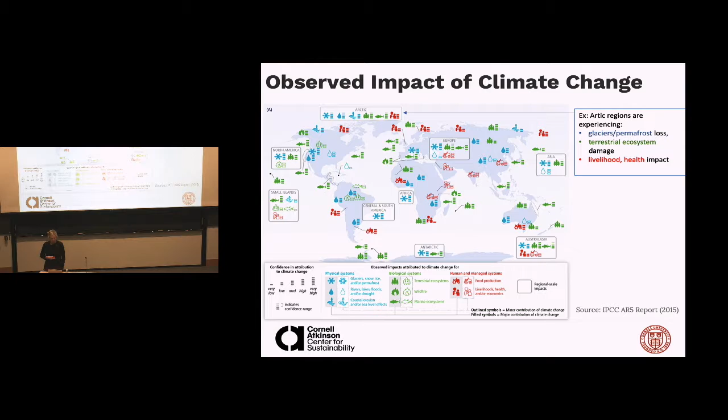In particular, I know that a lot of people here at Thayer and at Dartmouth more broadly are working in the Arctic, and that's where we see some of our most important climate change impacts that we know are a result of anthropogenic activities.

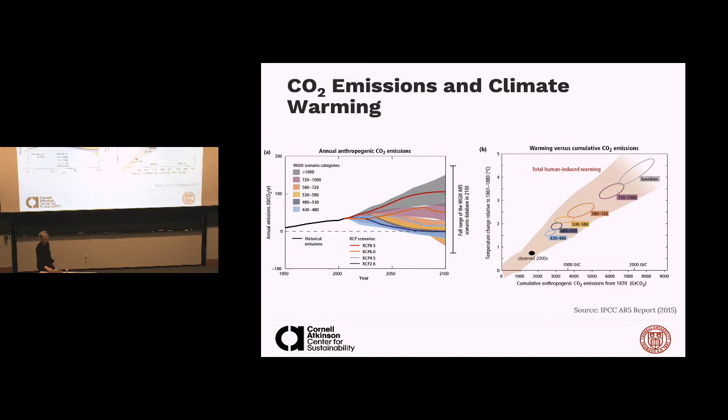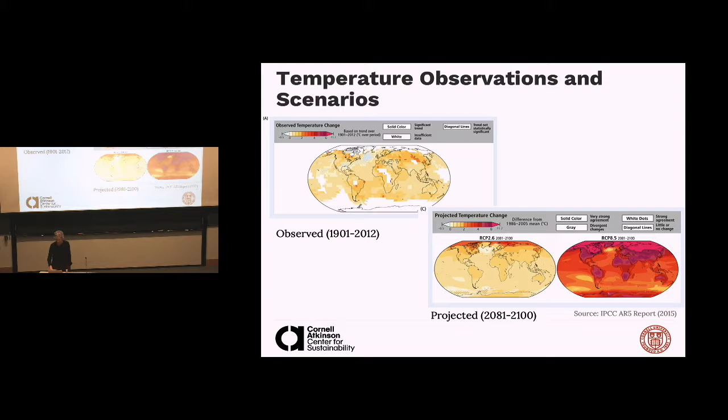Based on that report, the IPCC then tasked the team to look at what do we need to do to really limit our warming to 1.5 degrees C, right? How are we going to keep ourselves here? And that working group did a really deep dive into what would be involved and whether we could actually do it or not, right? So how are we going to be able to limit that warming, not even into the undetectable level, sort of between the moderate and high, right, is the best that we can shoot for in this case.

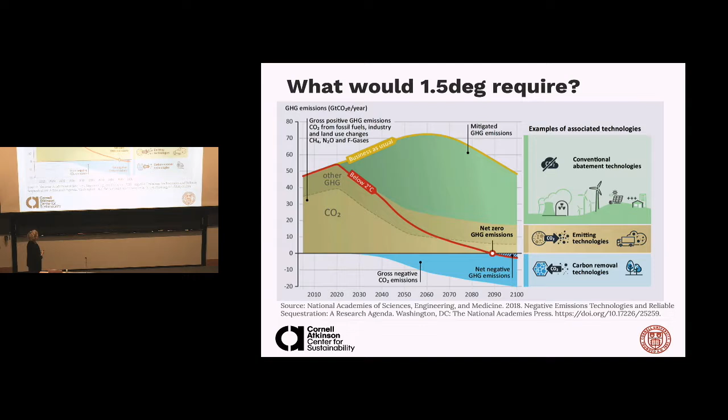So we're going to change the way we behave. We're going to actually capture. We're going to reduce our emitting technologies significantly. And even if we do all those things right, we're still going to have to figure out how to take CO2 out of the air. Right? Even if we do everything that we need to do and we all change our lives completely, we're still going to need to be able to actually do net negative greenhouse gas emissions to make that work. And it's going to cost us money. It really is, right?

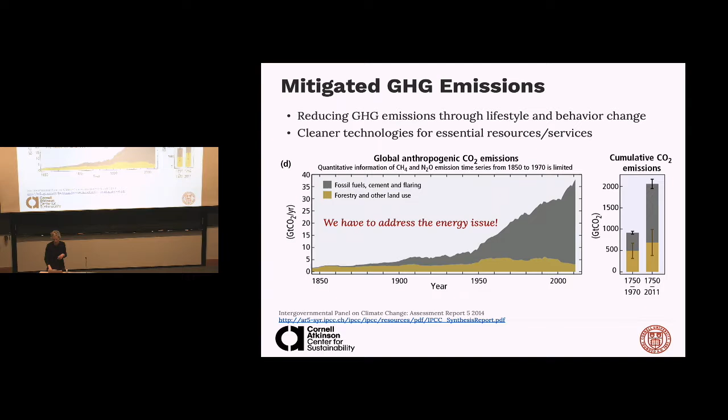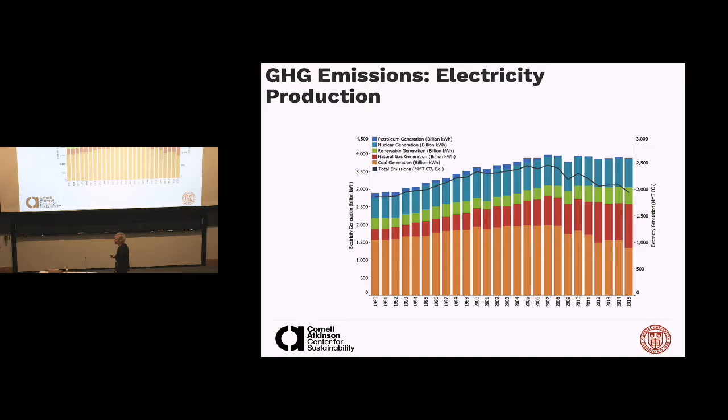This is greenhouse gas emissions from electricity production over 1990 to 2015. This is the electricity generation, so you can see generation is growing as we know it does, right? We have an increasing demand, and you can see that coal was starting to tail off, even here in 2015, and we were starting to increase our natural gas generation, which was seen as sort of a clean transition fuel, also had the benefit of becoming really inexpensive, which had a tendency to derail some of our other efforts. Nuclear was pretty stable. And renewable, again, sort of starting to grow towards 2015, but really not a big enough piece of the puzzle just yet.

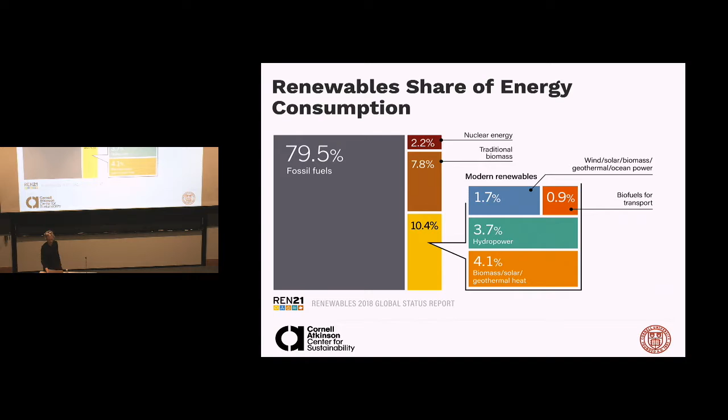That doesn't actually match with what some of us read in the news or what we believe. But the important thing is that this is the end use consumption, so it's a fairly small amount. And then, wait a minute. That's energy consumption. And then we move to electricity consumption. That's what I was looking for.

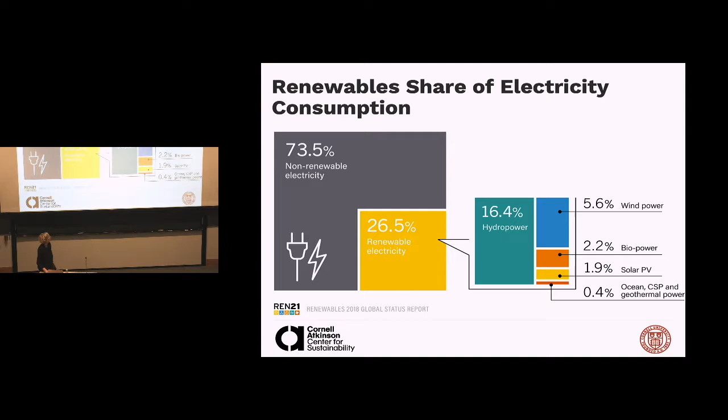So you can see that this number has changed, right? Because what have we taken out here? When we talk about energy consumption, we're still talking about transportation systems. Now we're talking specifically about electricity production, and you can see renewables look much bigger as a fraction of the electricity we generate, though hydropower still really dominates. And wind looks bigger because we basically only use wind energy for generating electricity.

Okay. This is the point I was going to make: the difference between those two charts is that the first one is in consumption, and the second one is in electricity. So energy versus electricity. I love to think about power. Electric power is what I do, so obviously I'm going to talk about that.

But the key things we can't forget about are heating and cooling. A lot of the heating, we use natural gas, so that's going to be a big part of our carbon footprint. And how's that going to work when we say we're not going to heat our homes with gas anymore, we're all going to plug in? We're all going to plug into this energy system that we're also going to put a whole bunch of variable renewables on. So we're adding stress at both ends, but it's got to be done because there's no point in decarbonizing this 20% and leaving the rest. We don't get what we need from that.

And the same with transportation. We got a small amount of biofuels going into transportation. Again, we can electrify transportation. I think it's a great way to go. But we have to figure out what that's going to look like on our electric power system and how we're going to manage that.

The good news is that when we add heating and electric vehicle charging to the electric grid, it has the potential to add a bunch of stress. It also has the potential to add a bunch of flexibility that we can use.

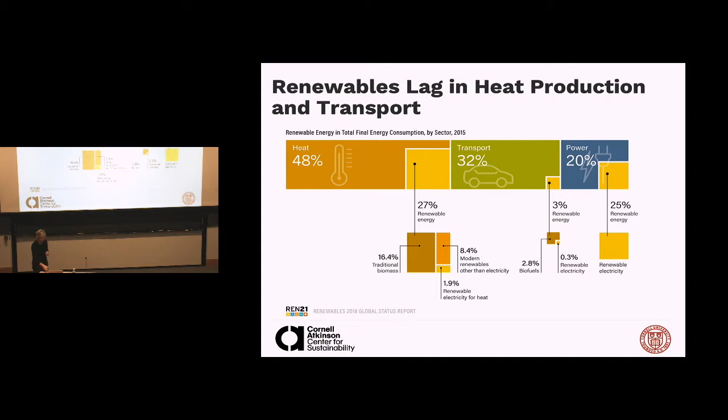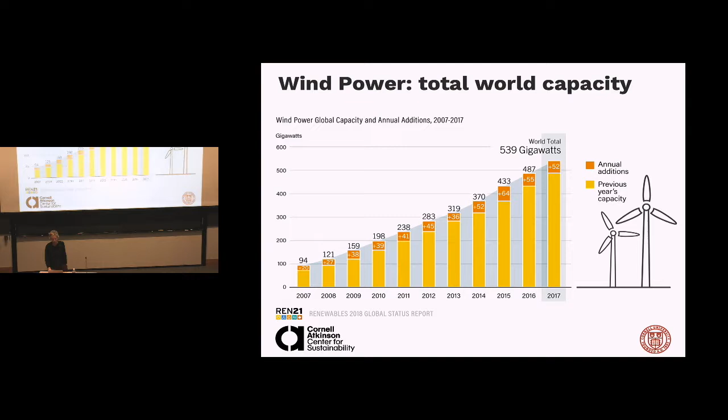And they're actually putting in larger solar PV plants, right? So at first, it was a lot of behind the meter stuff, but now we're seeing not just behind the meter, not just rooftop solar, but also community solar and large scale solar. And Asia has been investing hugely in this space.

So if we have a really great thermal gradient, right, we can dig a hole, we can get really hot temperatures from down there, we can create steam, we can run a turbine, and we can get electricity out of it. But if we don't have a super high temperature gradient, we have sort of moderate gradient, we still have some heat exchange capabilities right there. So that can answer actually quite a lot of that heating and cooling load that we were talking about that isn't addressed necessarily by the electricity system, right?

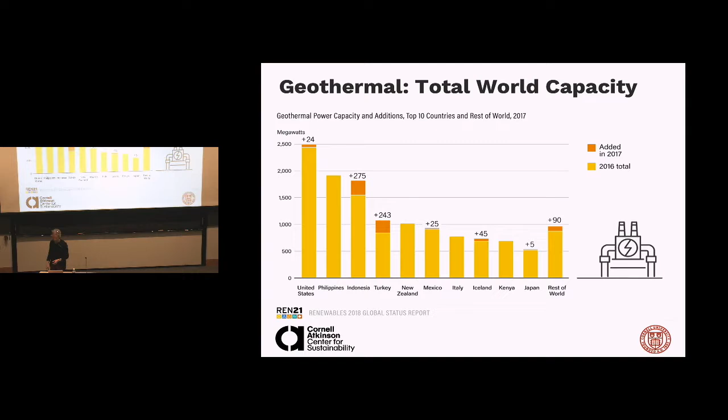But this is not for heating. This is just for geothermal electricity production, which the United States actually had been investing quite a bit. And I've seen some stuff in the news lately that this is also growing. So the whole point of all this was like, we got wind, we got solar, we got biomass, we got geothermal, right? We have all the pieces we need. I've told you why each of them is excellent. And they're growing.

So my question is, why can't we just replace all the fossil generators with renewables? Right? I just told you. We have all this stuff, right? And if you look at some of these reports, they'll say to you, actually, we have enough potential power from wind, from solar, from hydro that we can just meet all our needs, right? But we can't. And the reason we can't is this.

Okay, so the red, the hot colors are a little higher than normal, right? If you had like dark red, it was 10% higher. And the cool colors are lower than normal. And then this is the first quarter of 2010. So tell me where you're going to build your wind farms. Right? It's kind of unclear. So you go, oh, well, actually, these ones here, they're much higher. So let's do that, because it's dark red. All right. Second quarter. Right?

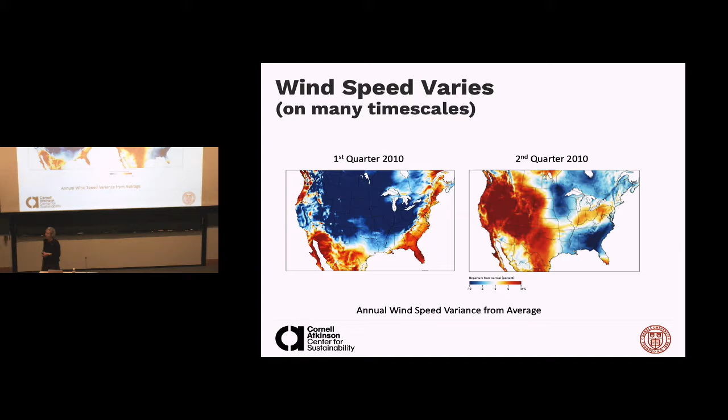I mean, this isn't news to you. I know that, but it's funny, right? Because it's stark. If you look at this map, or you look at the previous map, in one quarter, you've completely flipped over where your wind resources are available, right? So there's a lot of variability year to year, season to season. But that's not even half the problem. This is the other half of the problem, right?

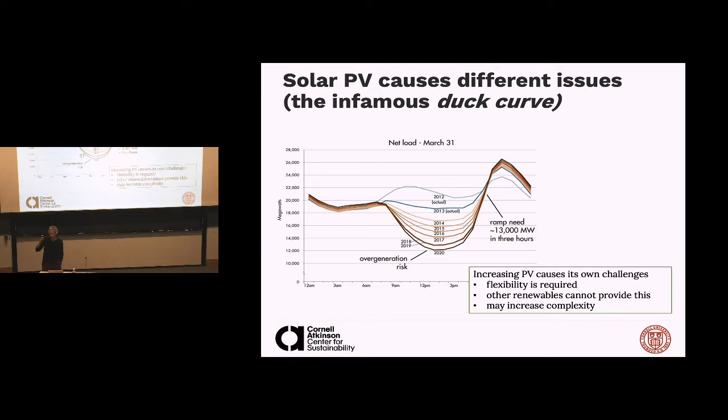And the concern with this duck curve is the unprecedented rate of ramping. Right? So we need generators available or resources. Right, we need resources available that will be able to quickly ramp up and down to balance that out. Okay, so this, I think I'm gonna, how am I for time?

This was just to explain really how the timing is important. The important thing is that at the day ahead, 24 hours ahead, the system operator has to look at their forecast for the load for the next day and decide what generators do I need online for which hours to manage my forecast, right? So if you have a lot of wind in your forecast, you can't really control those within wide swings, right? And so you have to think about what you might need, and those decisions have to be made well ahead before you actually get to update your forecast with this short-term, more accurate forecast. And then you need something to be able to balance it in real time.

So I don't want to focus too much on this, but this was to remind me, essentially, to explain to you why making decisions within the real time or the really short time scale when our forecasts are much more accurate is actually not possible for the bulk of our generators on the system.

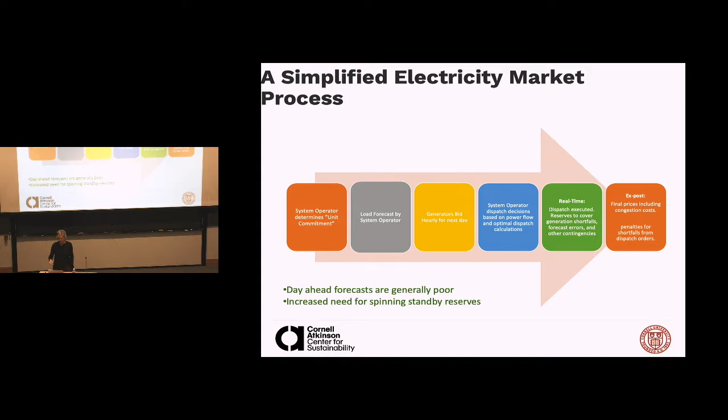Utility scale batteries I talked about with people today. We're not at a good place that it's really viable economically yet. Certainly if we had those, that would be a game changer for our storage. But we really have to think about the ways in which we operate the grid if we had utility scale storage around, which is what I spend most of my time thinking about.

And then there's also distributed storage, right? So sometimes people think about vehicle to grid, this idea that we could take electricity out that's stored in cars and use it in the grid. But even a first step for that would really be allowing us to leverage the flexibility, right? So I was telling a few people today that in Ithaca we have this test bed that's running this electric car charging, right? It's a simple program within a pilot program that we have in Ithaca

in the test bed. And what it does is they're collecting data on baseline right now, but the plan is that when you plug your electric vehicle in to charge, you tell the app when you need your car charged for. So if you give 12 hours, you're going to pay less for that electricity than if you give 2 hours or 3 hours, right? So you're sort of being rewarded for providing that flexibility to the grid to be able to charge more or less depending what the current situations are.

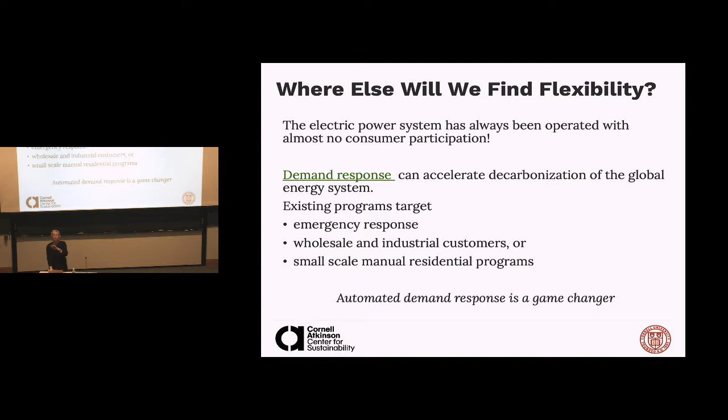So if we could leverage those things, because they're right where we need the flexibility, right where the loads are. And then we think about even the idea of distributed energy resources more broadly, right? So I guess I said these things, but washing machines that you can delay the start for a few hours, into the evening, hot water heaters, air conditioners, plug-in vehicles. I've already made my case. I keep getting ahead of my slides about why I think plug-in vehicles can provide flexibility, as well as rooftop solar PV and residential scale battery, which seems to be a growing area.

Somebody was telling me that Green Mountain Power is running a pilot here now where they essentially give you the battery to work with your solar in exchange for them being able to control it. And then if we can connect these things with some sort of controllers in our home, and this is just, it's not for real, but you could actually do this in a really easy and perhaps even fun way, right, that would support the system transition.

These things are growing for sure. Behind the meter storage grew in the last couple of years and is projected to grow huge. I mean, everybody's been predicting batteries to grow huge for a long time. Smart meters, definitely, right? This is only 2020, and these things are being deployed all over the world. If you look at electric vehicle sales, though I understand Tesla's electric vehicle sales fell for the first time this quarter, Asia Pacific shot up, so I think Tesla's happy. I heard they actually made money. And smart appliances, which have something as simple as a delayed start, or as complicated as some sort of automated signal response.

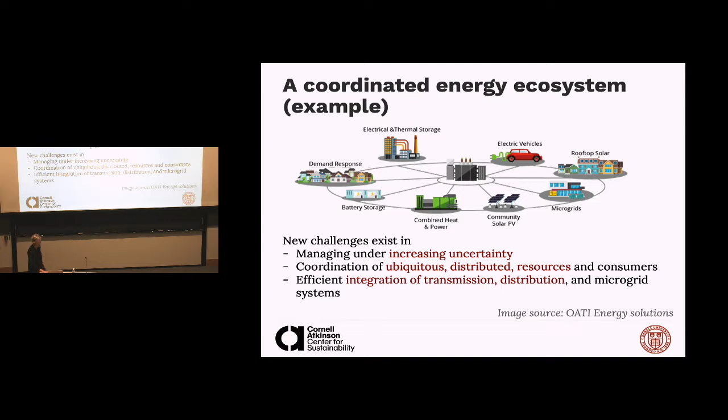So they don't talk to the distribution system. They don't know what's going on in the distribution system. And in fact, somebody from an ISO very recently told me they don't care. They don't want to know. They've got enough problems. But if we are really going to leverage all those loads to help solve this problem, we have to figure out how to put those things together. So the physical structures are really the same between what we have now and what we may have in the future, with the exception that we'll have more distributed resources and hopefully more coordination.

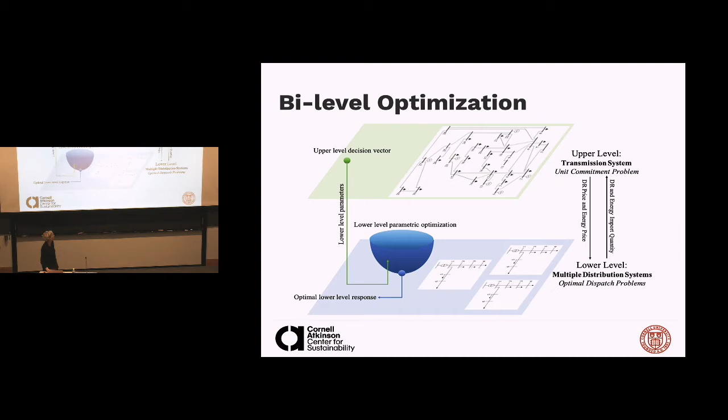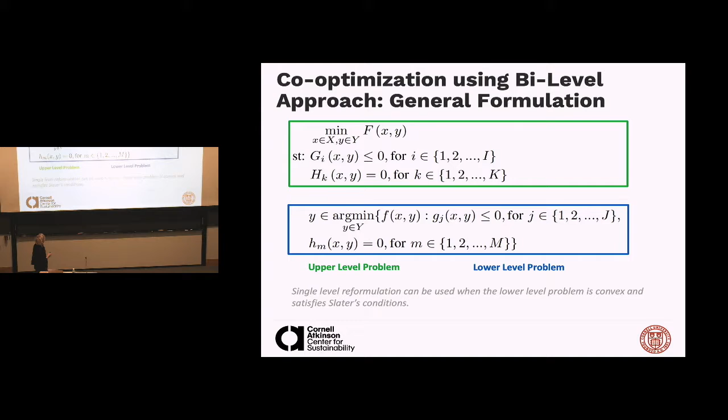So how does that work? Essentially, this is a general formulation of a bi-level optimization problem, where you have your upper level problem and you reformulate your lower level problem. This is the lower level problem in the blue, and then you can reformulate it into one problem. I don't want you to know the details, but essentially this is the upper level problem: this is our power flow, this is our cost minimization objective function subject to our limits of power flow on the lines, as well as what we can generate.

We have to meet balance at all the nodes, right? Anything that goes in has to be consumed. And we also meet reserves, right? So we have some excess generation that we could use if we need it. And then this is the very similar problem for the lower level distribution system, where we'd have multiple distribution systems on this system.

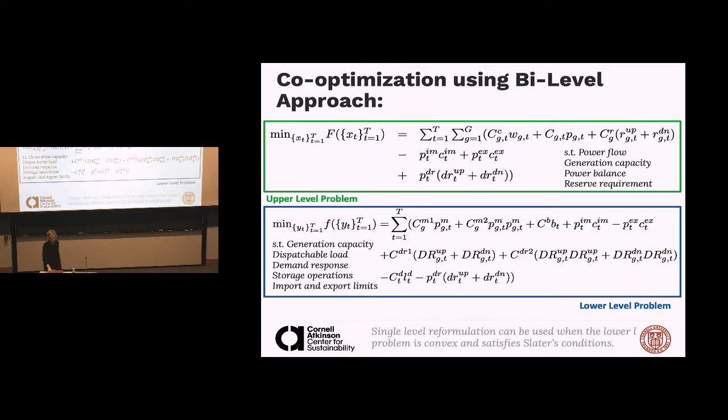And they make decisions about providing either demand response up, so we increase our consumption, because that also might be necessary, right? If we're overproducing, for example, in our wind farm, we might want some loads to increase a little bit to balance that out. Or downward demand response, and what those cost functions might look like and what would provide the incentive. So we can reformulate that into a single level problem subject to some conditions and convexity constraints.

So if you want to talk about the actual nitty-gritty details of that optimization problem, we have a couple papers that describe how we incorporate the uncertainty into it as well. But I wanted to just give you this idea of, yeah, we'd have to completely change how we operate the system, but there are ways to do that, right? So we're testing it on some case studies, and I want to tell you what this looks like.

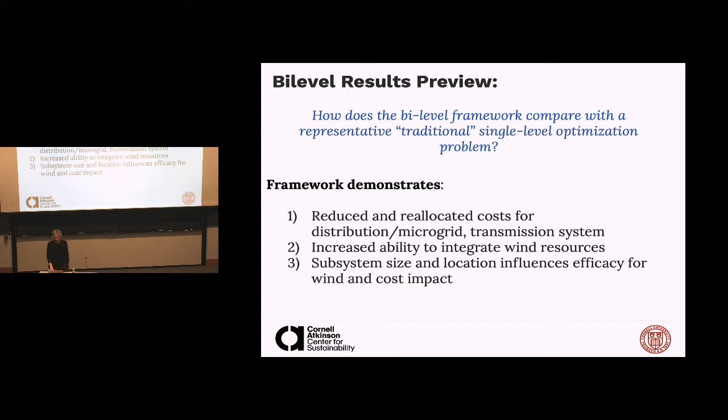Advanced notice, we get some reduction and reallocation of costs for the distribution system and the transmission system, but we are able to actually integrate more wind resources without causing reliability problems in the grid. And certainly there are impacts of subsystem size and location in terms of costs and the wind capability. I'm going to just go through very quickly. So, interesting points. This is the cost for serving.

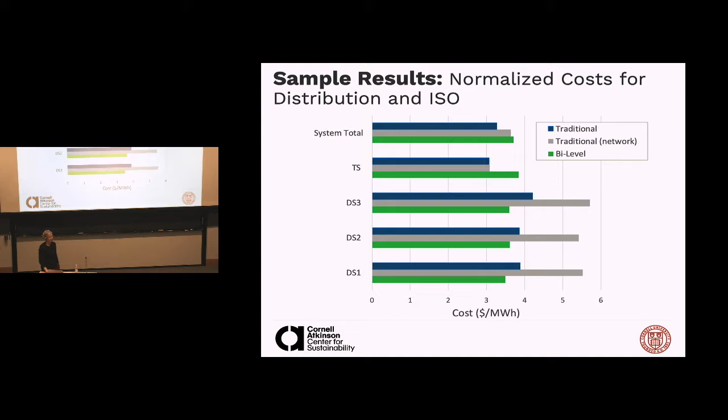Mathematically, it's correct. The transmission system operator may not necessarily agree that they should pay more, but on the other hand, in this case, now we're leveraging flexibility and demand response at the distribution level, so they're getting paid for that. So that's why their costs are going down, right? Because they're getting paid for the service they're providing. This is just normalized to the amount. It doesn't show anything new. It's just normalized to the amount of energy that's actually provided.

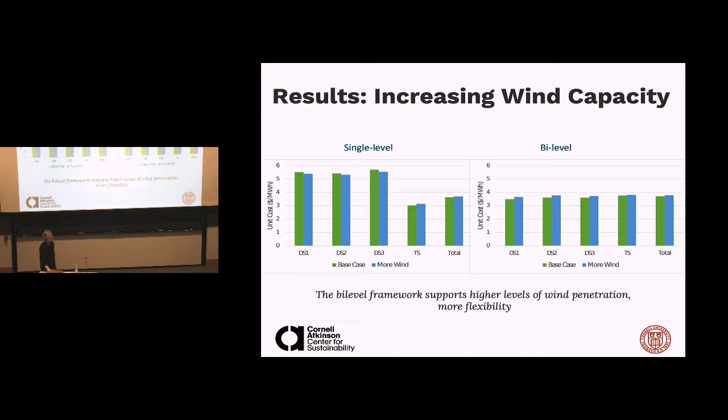The other point that I wanted to make is that you can actually incorporate more wind, right? So you can incorporate more wind without seeing the same level of cost increase across the system. So we can get higher levels of wind penetration, and we don't see the reliability problems that we had before. And is it scalable? So what do we get as we add more? So this is one transmission system and one microgrid, one transmission system, 3 microgrids, one transmission system, 5 microgrids, right?

And so we see that the more subsystems that we have, the more flexibility we get. And that means that we see more benefits, right? So we see more benefits from doing this bi-level decision-making, cooperative decision-making, let's call it. You get more benefits from this cooperative decision-making as you add more subsystems in, right? So everybody wins because the transmission system gets more flexibility, and then the more systems we add, we get more flexibility, and then they earn more money, okay? So that just provides additional benefits.

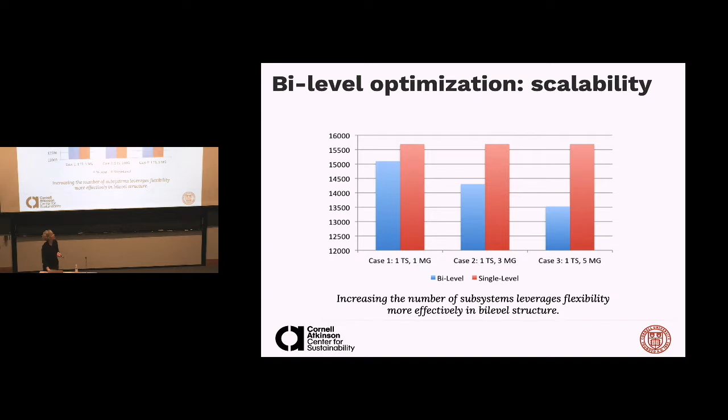So the benefit of this approach is that all the systems decisions are directly kind of co-optimized between the systems. They can better leverage the load flexibility that they have. I would argue that the costs are allocated a little bit more equitably. We would have to talk about that in a little bit more detail, but sort of rough back of the envelope instinct, right? You provide a little more flexibility, you should pay a little less money, right? So I'll ask you to believe me on that. And then we have better ability to integrate wind, and the subsystem sizes are important.

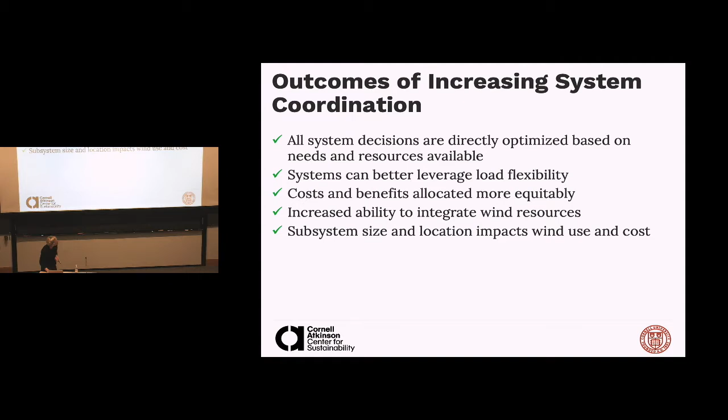One other thing that I quickly wanted to talk about was the idea of microgrids that are now in the mix. One of the things that we've also been thinking about in my group is why, in every stochastic optimization model of any power grid ever, we always just minimize cost, right? What about maximizing environmental benefit or minimizing emissions or maximizing reliability, right? Those are all really valid points.